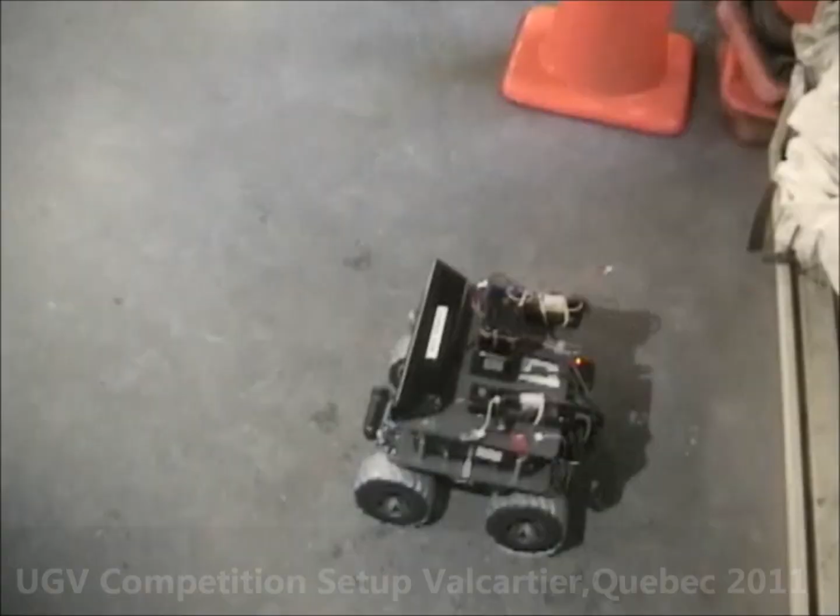As an extension to our work, COBRA was invited to compete in the fastest growing student competition in Canada. The Unmanned Ground Vehicle, or UGV competition, was hosted by Unmanned Systems Canada and was the first of its kind. The challenge posed was to design a ground robot that could navigate a complex, unknown environment from start to finish while identifying targets along the way.

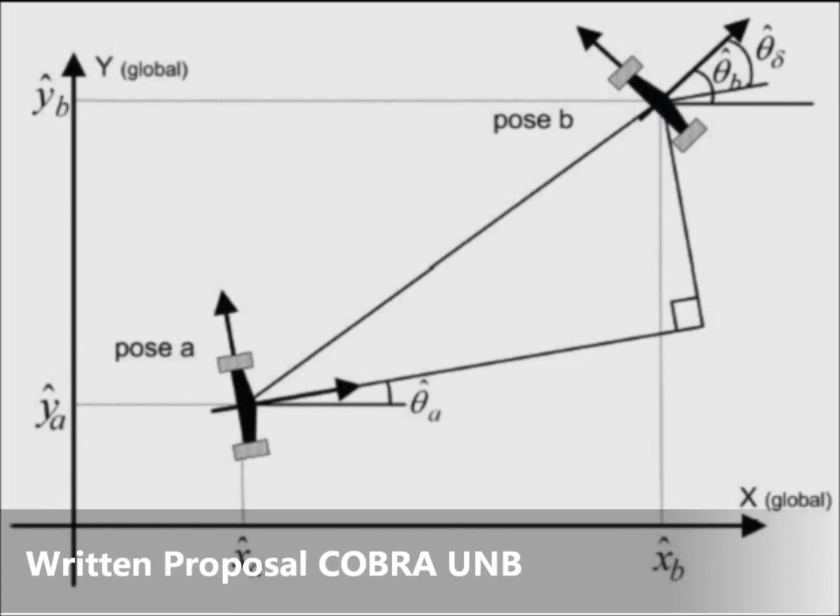The competition consisted of two phases. The first phase was a written proposal graded on quality of presentation and innovation of proposed approach. UNB COBRA won first place. The second phase consisted of implementing the proposed algorithms on actual hardware and a final demo in Valcartier, Quebec.

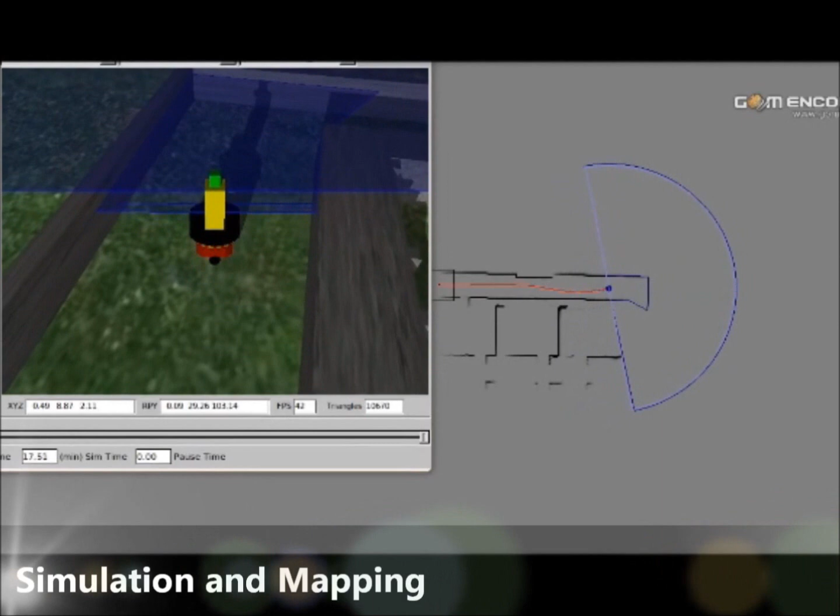Preparations and testing began many months beforehand. In their approach, the COBRA team used Simultaneous Localization and Mapping, or SLAM, to build a map of the environment. Path planning algorithms were developed in a simulation environment and then tested on the real hardware.

In order to navigate in the unknown environment, the robot had to be able to avoid obstacles while moving towards the goal and identifying targets. Recognition of targets was done with the Kinect camera designed by Microsoft. This camera gives an image and a corresponding depth map so that locations of targets can be precisely determined.

In May 2011, the team embarked on its trip to CFB Valcartier. At the competition site, the details of the approach were presented to the judges. Finally, a test run was done in the unknown environment. The robot was able to successfully move through the environment to the goal while avoiding obstacles and identifying targets.

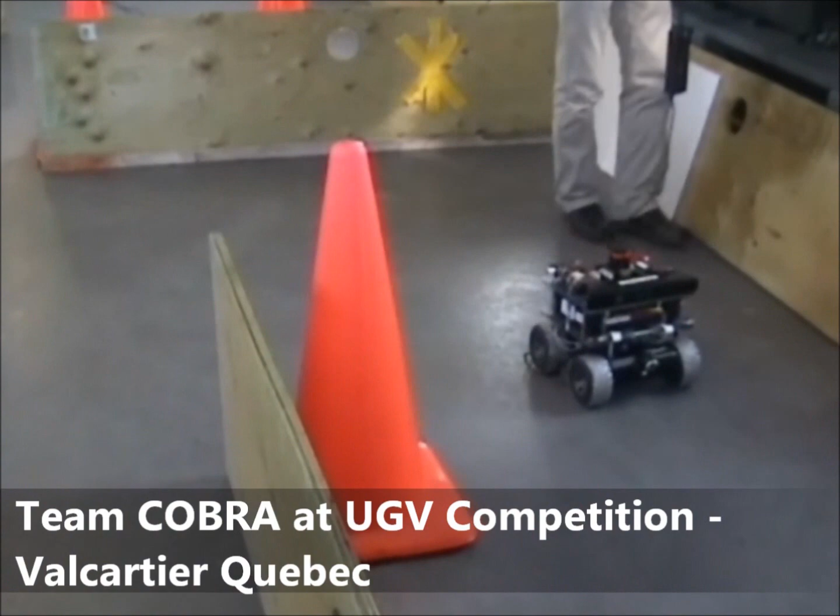Team COBRA won first place, crowned champions at the first ever unmanned ground vehicle competition. COBRA was also the only team to compete in both the UAV and UGV sections of the competition.

To cover a lot of ground quickly, an airplane is the way to go. An electric foam glider was fitted with the necessary sensors to measure its orientation and conduct autonomous flight. The desire is to collect aerial imagery for forest fire protection.

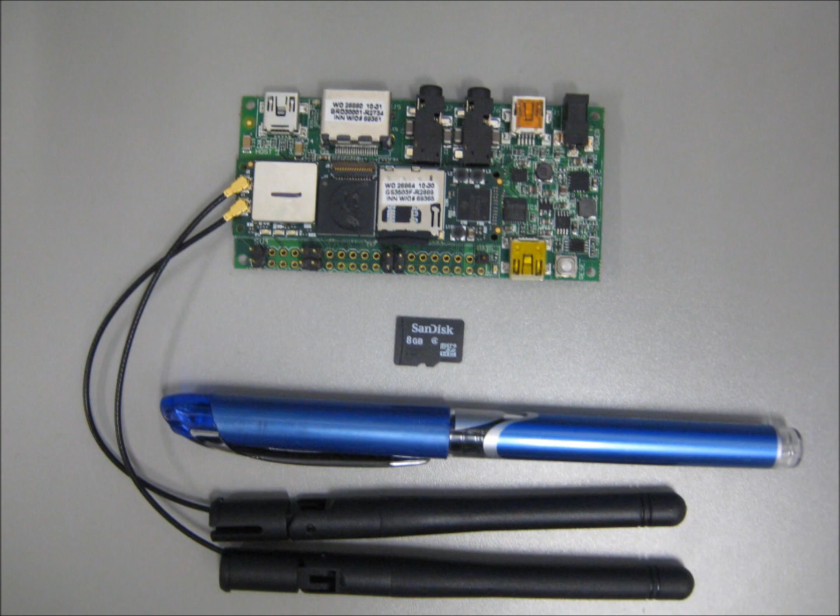Each vehicle will carry a payload of sensors and computer hardware. The heart of the onboard system is an embedded Linux computer the size of only a stick of gum. Software running on the single-board computer controls all the functions in the aircraft.

COBRA is working with Defense Research and Development Canada on underwater mine countermeasures. COBRA has come a long way since its conception in 2009, and the future is bright for this team of skilled and dedicated researchers. Look for more updates for this team in the near future.